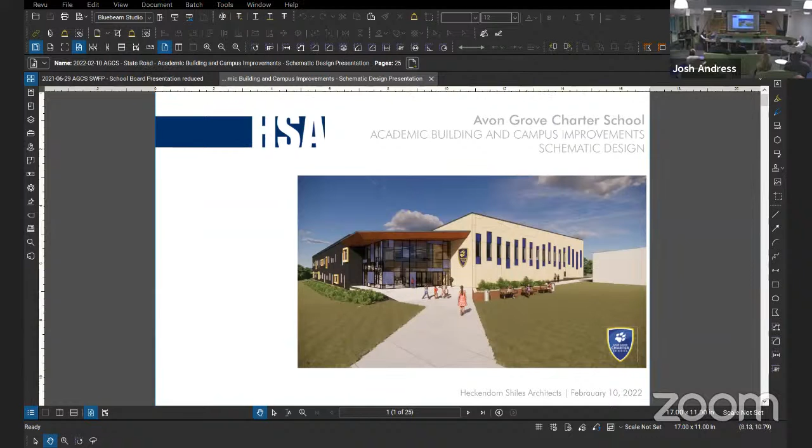Can we figure out what that echo is? Because I'd love to... they're hearing it. I don't know if it's one of your speakers. I want to be muted. Click that. How about now? Perfect. Yeah, thank you so much. Thank you. No worries.

So our intention this evening is reviewing progress, reviewing potential scenarios. There's no intention to make any commitment tonight to move forward with really any allocation of funds. We want to be very deliberate about the potential allocation of funds and taxpayer money to this project. Really, the goal this evening, to a large degree, is allowing the administration to move forward with more specific evaluation of underwriting and financial planning.

It's also important to note that I look at this project as a continuity in the long term of the charter school. Back in 2008, there was something on the order of a 20 million dollar bond that allowed for the rejuvenation of Kemblesville. It allowed for the realignment of Peacedale Road. It paid for connection of sanitary here and many corridor renovations, and an initial smaller scope renovation in the auditorium.

Then in 2017, there was an additional bond issue that afforded the classroom addition at Kemblesville, as well as the space that we're sitting in now. So I think it's helpful to think about this project as a continuity of capital improvements throughout both campuses. And certainly this is an opportunity to plan for the charter school to prosper into the next 20 years or so.

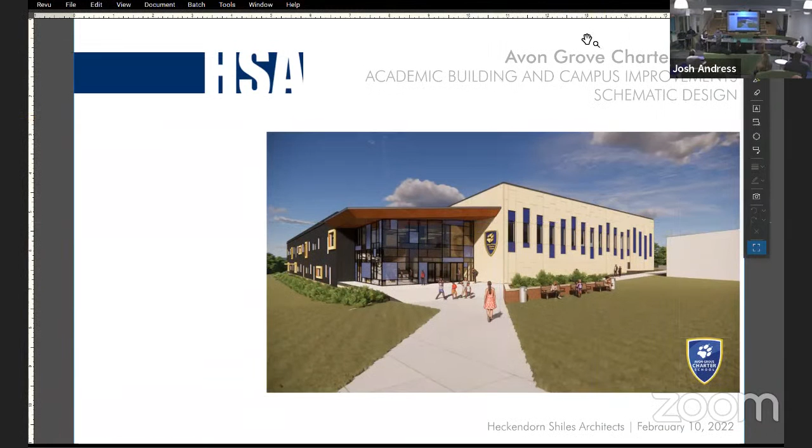So just to lead off, we included this sheet in the overall presentation to help give a little bit of a summary of the extensive amount of work and information gathered and developed since we last met in June. In June, we met with the board and reviewed the conceptual design at that point and the overall master plan for the project, and got direction to move forward in the schematic design, looking at all the campus improvements and looking at a new academic building with the component of the gymnasium included in that. So that's what we set forth with after June.

We contracted with a couple of our consultants to look at the mechanical, electrical, plumbing, fire protection aspects, structural, and really the big piece was site civil, looking at the site design as well. So that's one of the big pieces with this campus and the plans we were looking at.

As a team, we developed the documents that we were able to utilize to garner a construction estimate. That was the end goal of the schematic design process, our design phase, to get the estimate put together. We worked with a third-party estimating firm to put that information together, and we'll be able to go through the budget later. We have even more detail that they provided to us that's not in here. But basically, to get to that point, we put together architectural drawings, the actual one sheet drawings, similar with the site civil drawings. We got a full MEPFP narrative with some site drawings associated with that, and a full structural narrative as part of that as well. So pretty good information for the estimator to utilize in their efforts.

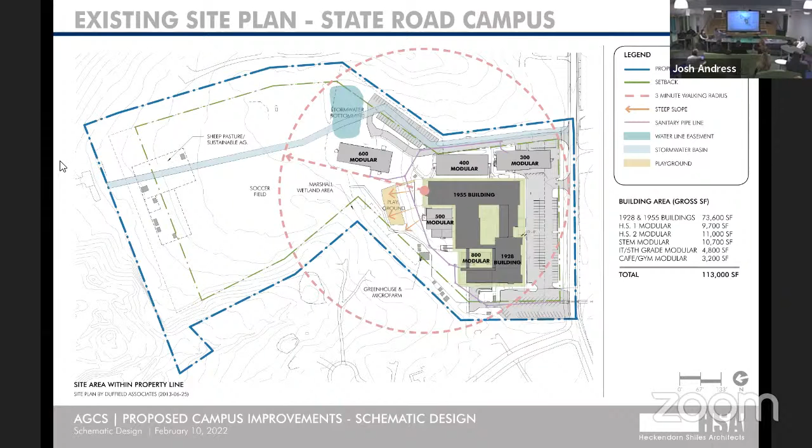This is what we were looking at in June, as far as the overall location of the building and the overall master plan scope of all the campus improvements. The modulars 300 and 400 would be going away, and there would be a new parking lot implemented - that's project A. Project B is the existing cafeteria modular, at the cafeteria level. Whether that is removed or repurposed is still to be determined, but that's the scope outlined.

Item C is this outdoor amphitheater. The intent there is for it to be built into the hill and utilize that steep slope to make it a seating area with a focus on this recreational field quad area. Item E is the suggested relocation of the soccer field.

Item D, which I skipped over, is the proposed stormwater basin. With building this building and all the paving, we have a substantial amount of stormwater that we need to manage on the site. The intent for this project was really to manage all the new construction we're doing, but as well there's an existing issue today where there's a large outfall of pipes that come out off the site and go down through the backyards of all the properties to get down to the stream. We would be trying to capture all of that and redirect it to the stormwater basin as well.

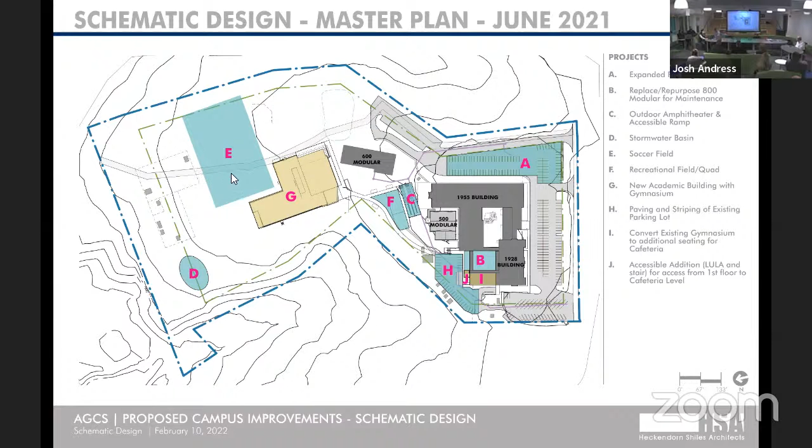That's the major change, with this building moving up here. The soccer field is still in this general area, but it does actually help the soccer field a lot, because when it was over the water line, a lot of fill had to come in to keep it level and maintain the grade. It got to some points where we were very deep to the water line, which isn't optimal. In this scheme, it really lets the field be what it wants to be, and does some nice things visually for the field.

From a campus planning standpoint, shifting the building to the east and reconfiguring it better engages the existing campus. These are 10-foot contours, so the topographic lines don't appear very significant in the graphics, but on the western side of your site, at the bottom of the page, there's quite a lot of slope. Positioning the building there was for a variety of reasons, but mainly because the water line was viewed as a concrete, immobile element. We think this not only saves a little money from a site standpoint, but it's just better campus planning for you long term.

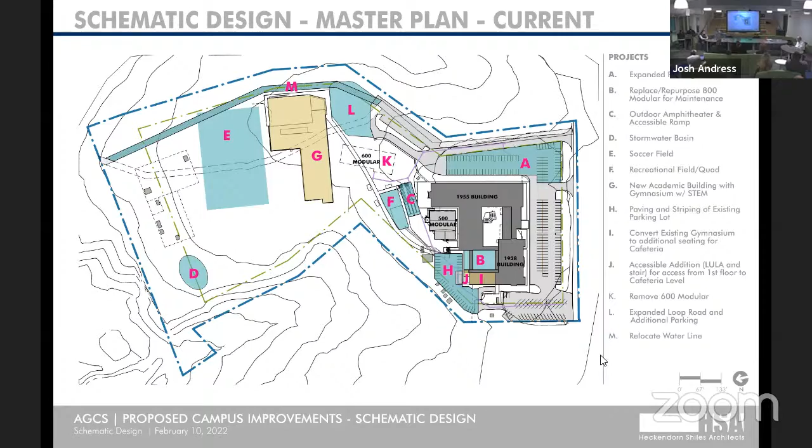The next slide shows the actual site engineer's drawings to give a little more reality as to how that would work out. Coming off of State Road down the loop road, this parking lot would work out and give you access into the main lot, but also down into Loop Road. You get additional length to the loop as well as the parking.

The existing stormwater basin that's there today would be relocated to be a partial underground system, but then also fed into the new stormwater basin on the corner of the site. The building itself, you can see the walkways being proposed, though the exact paths still need to be massaged out.

What's really nice here, and what the township was happy with, is the fire lane and emergency access. The previous location was becoming a challenge because of the sloping around it, and how to get vehicles to it. We had a couple creative solutions they were involved with, but this is much more straightforward—you come down Loop Road and go right around the building, with full access around it.

The way the grading works out is nice, creating a berm that you go down to reach the soccer field, sort of creating a little hill. You're at a higher elevation as you come out of the building, on a natural hillside to sit on and view games. That was a nice little benefit of that solution.

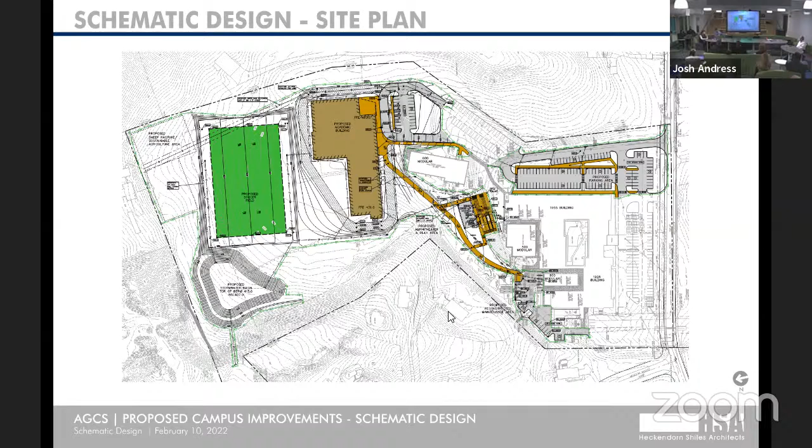So I just wanted to run through the building. I don't need to get in great detail, but this has changed a little bit since we've looked at this last. Still the intent we came into this with, I think we had 27 classrooms, 2 specialty rooms, learning center, like that's part of the educational program depicted in here. We had some administrative pieces we were incorporating, and then the gymnasium. Those are the big picture chunks we were incorporating in this project.

So heading down and into the classrooms, one thing we discussed briefly was looking at the collaborative spaces, and how, especially at Avon Grove Charter, you see throughout the hallways the different types of seating and styles offered to students and how they're all utilized. Even in this space, how those different space types work, everybody works a little differently. The thought was to provide that same variation in this building as well and build it in.

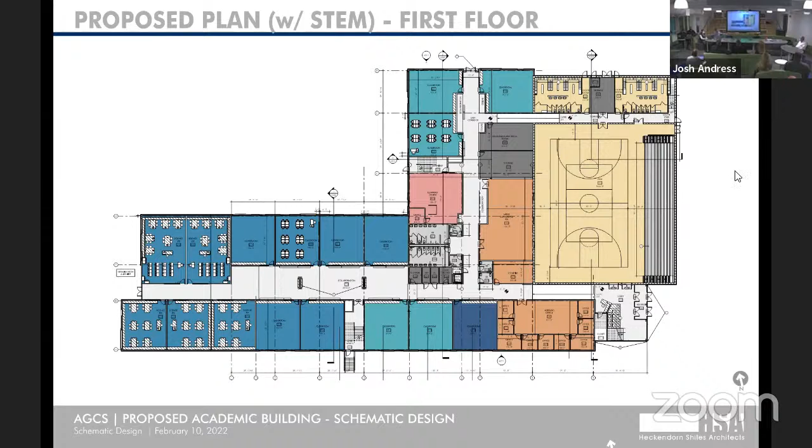The one thing to note again is the gymnasium space. In reviewing it with a structural engineer, for this volume of the gym and locker room, the most efficient way to build it was to incorporate the footprint of the locker room into that two-story space, keeping it one clean rectangular structure.

What that gave us was additional square footage incorporated on this second floor, which we've designated as a fitness center above the locker room area. It has potential for access down to the gymnasium from that level, giving another space for that function.

Is there any questions before? I mean, that's sort of the big picture plans, but I just wondered if there's any questions on that.

In regards to the second floor and access, have you incorporated elevators that would be handicap accessible? Yes, there's an elevator at the core of the building. When you first come into the main lobby, there's an open stair that goes up, but once you go back to the very central portion of the building, there's an elevator that will take you up.

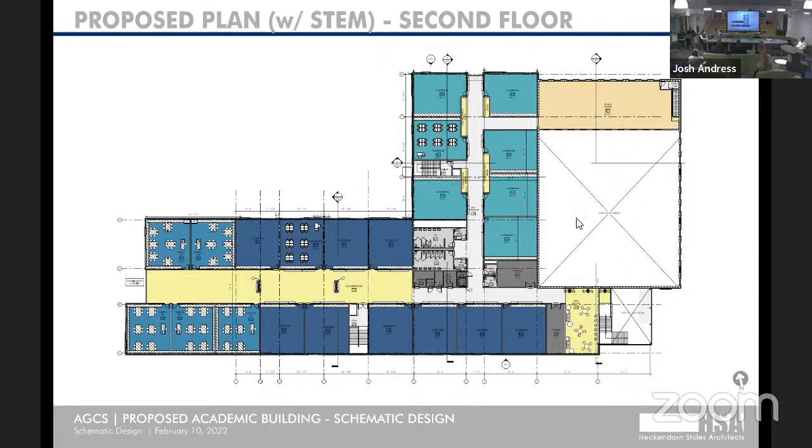So just moving through, this is an elevation to give a little highlight of some of the drawings we've created. Big picture, what we're envisioning is a combination of materials and elements.

Speaking about the parti of the building, we have this little jewel of an entry piece, and then the classroom wings and the gymnasium. We've thought about addressing them in the same way in elevation, so we have more of a glass entry with a wood canopy overhead, which becomes the entry point.

The classroom wings are metal, proposing a metal panel with a randomized fenestration system. We've been able to determine a patterning so every classroom gets about the same amount of daylight, but from the exterior it still has a bit of a randomized look.

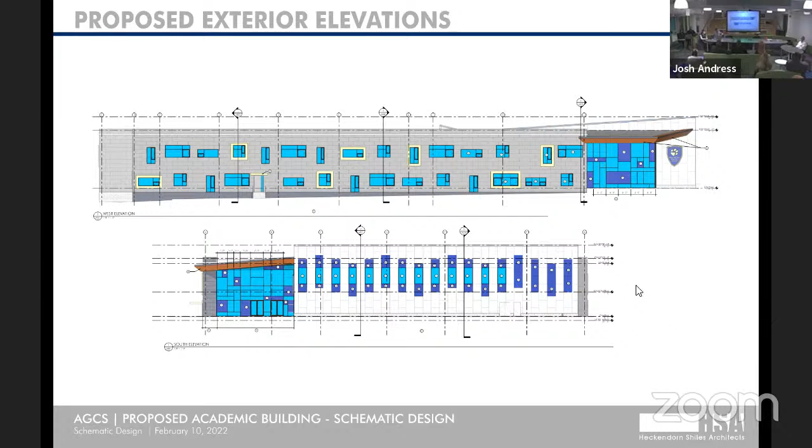At the gymnasium we'd have some glass coming in as well, and we're proposing a fiber cement panel there, similar to material used at the Campbellsville addition, but using coloration differentials to make it more playful while keeping it simple construction, with an undulation of the material to create a playful wave on that building.

So now we have a plethora of renderings here. This is again the view in that original location, Location 1 as we were calling it. This is coming up to the main entrance, the gymnasium space, classroom wing. This is still showing the 600 modular location as it is today.

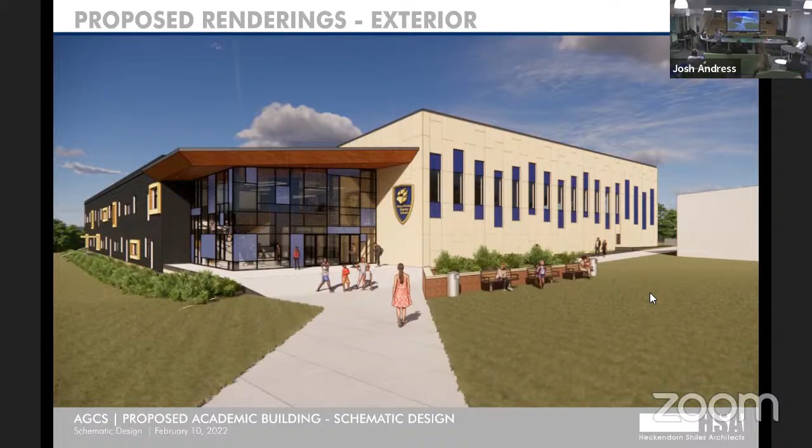And then moving into the lobby, we're proposing more of an open lobby space. That wood canopy at the entrance, the idea is for it to drive through the whole space to help tie the inside and outside together, with some graphic walls to help tie together goals and branding from the school onto the gymnasium wall, leading you down into the corridors.

These two doors would take you into the gymnasium on the right, with some bird's-eye views from the upper level into the gymnasium. This is proposed as another open collaborative space, so as you come up the stairs you're in a more comfortable zone. At the main entrance we have a greeter station as well as some built-in seating incorporated.

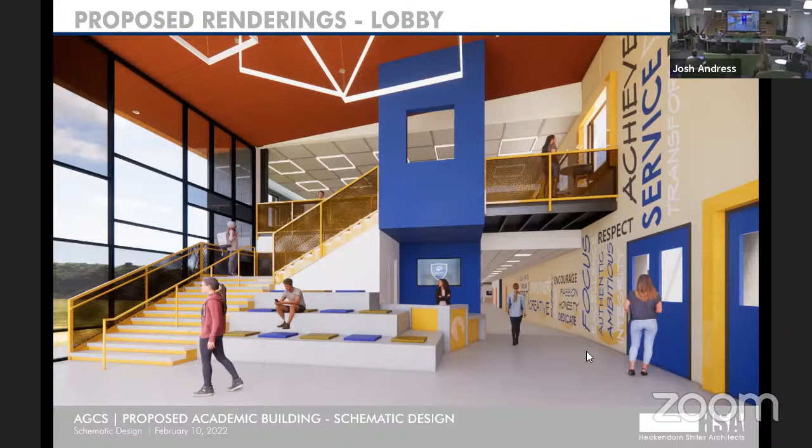We partner along with Corbett, who has done a fair amount of furniture work at Avon Grove Charter School for classrooms and different spaces, this space included. We work hand in hand with them to put together images of our typical spaces. This is a proposed typical classroom, showing some accent paint and how that furniture goes in. The idea with the classrooms is to be pretty typical for a large portion of them. Obviously the science classrooms would be more specialized, but these rooms would be a straightforward and clean design.

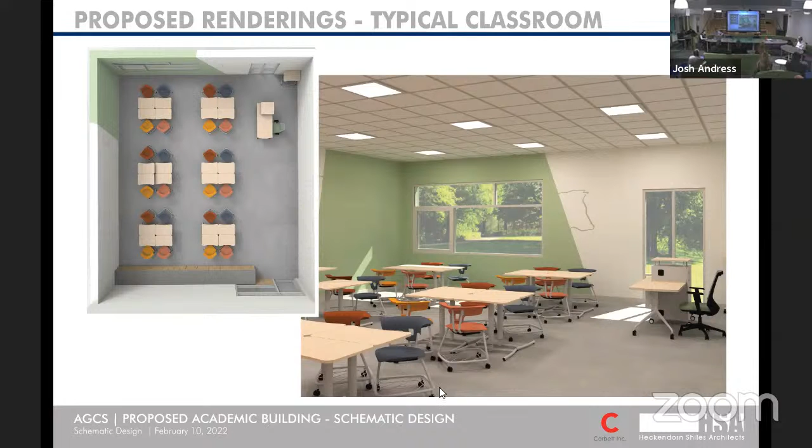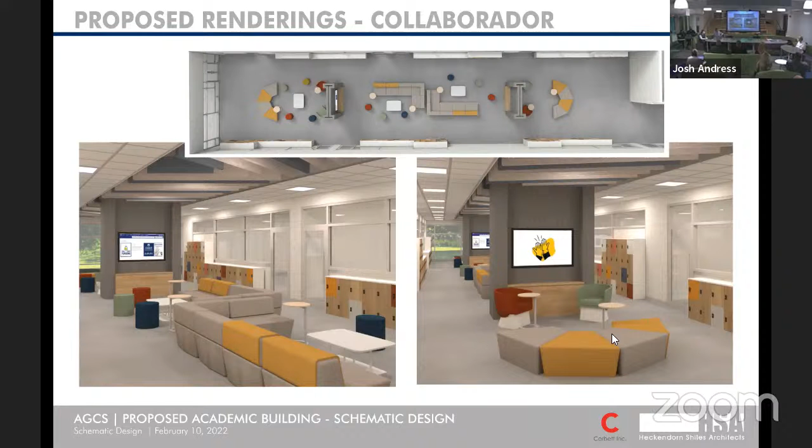We have a couple images of the collaborator space, the open space that the classrooms empty out into. This slide and the next both have imagery for that, and this one depicts it lined with lockers, which would be located in this area as well. We're looking at furniture solutions to develop the space, and at building some built elements to help organize it and give displays. There are two different schemes looking at different ways of doing that. One option is a little less built-in to give more flexibility, with more of the displays built in as part of the furniture rather than as a constructed element, again for long-term flexibility to allow the school to change how that space is used.

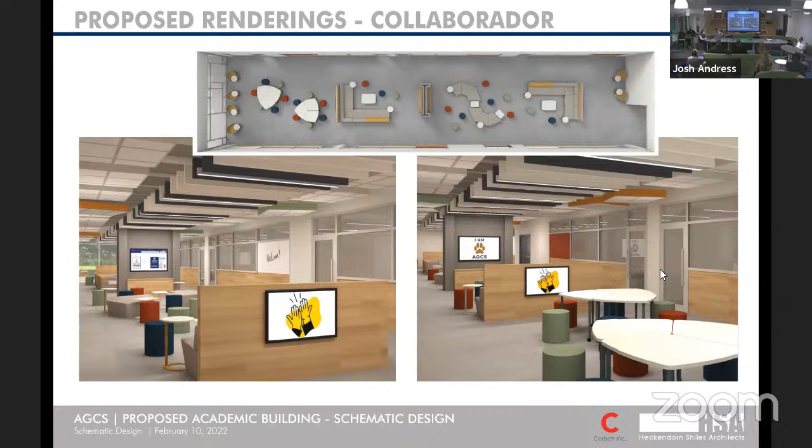This is an image of one of those collaboration nooks, down near the end of the corridor. This one actually combines it with the one across the hall, aligning to create smaller scale spaces that are undercover with a lower ceiling, with some whiteboard writing surfaces, giving a bit more of an intimate feel for that use.

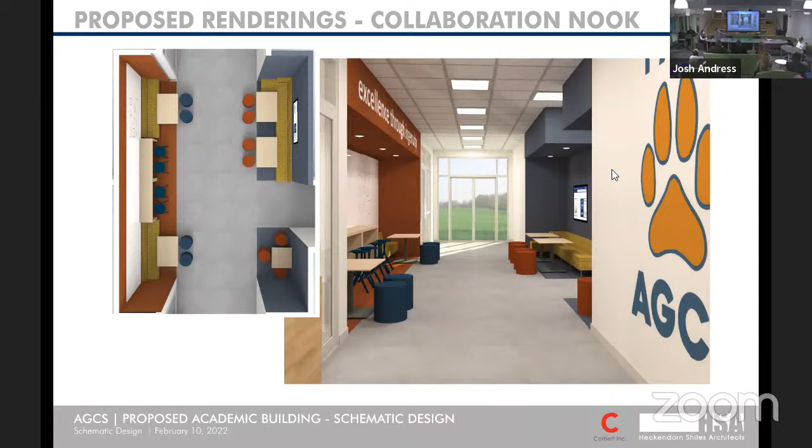I have one image of the hotelling space, the open hotelling office with the private offices around the perimeter of that.

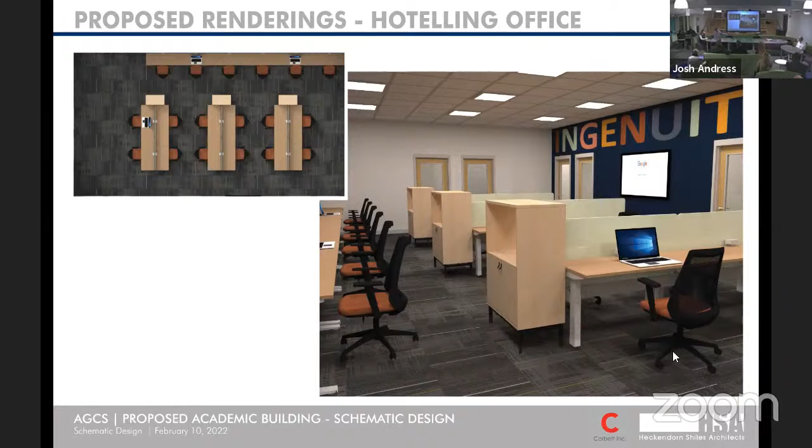Yeah, so from a budgetary standpoint, what we wanted to do was track with some continuity. No, we just wanted to be able to track with some continuity. Yeah, I should actually zoom in. Yeah, I would have just exited out of there.

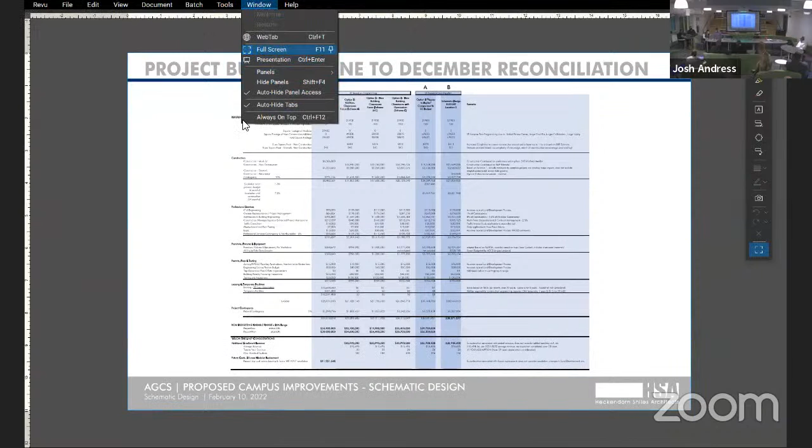We wanted to track with some continuity between what we had looked at with June and where we are today. We really have two different ways of looking at budget. This first one simply compares what we looked at back in June to where we are now, in an apples-to-apples condition. Then our adjacent, next budget looks at some different potential scenarios that would be worth considering in different fashions to move forward.

Back in June, the budget evaluation started from our collective knowledge of the need to replace the modulars. We looked at option one, essentially a modular replacement project. Option two was an addition to the existing school as a classroom building addition, with two different options, or three different schemes: scheme A was an addition with just classrooms, and schemes B and C were a new building with just classrooms. Option three was a new building with classrooms and a gymnasium, and that was the direction the board asked us to proceed with.

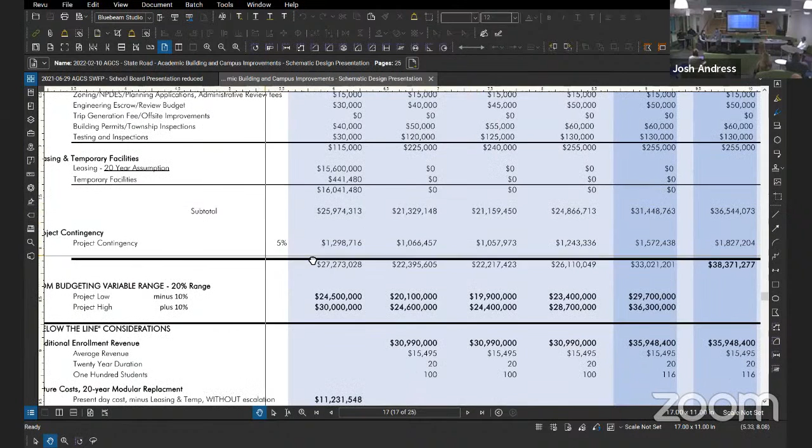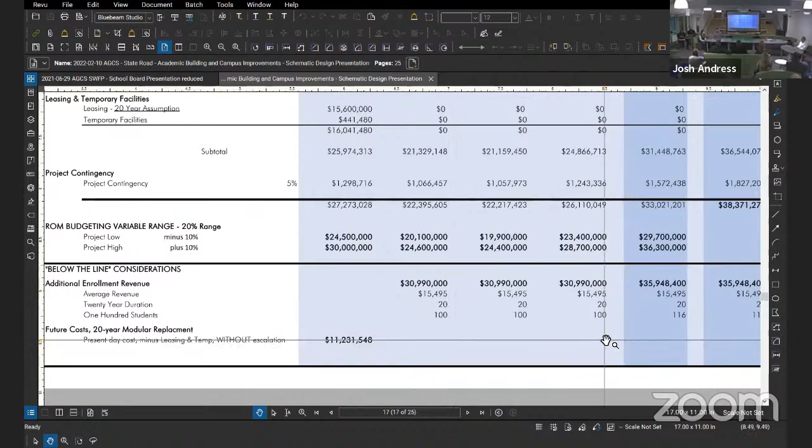Just as a reminder, with the modular approach there's additional cost in terms of life cycle lease costs and life cycle replacement costs after 20 years, et cetera, that hard construction doesn't bear. In all these scenarios we carry project contingency and construction contingency, and we also quantified some below-the-line numbers associated with additional enrollment revenue, expecting that bricks and mortar construction versus modular would enhance, to a small extent, the student population. Back then we were just carrying 100 students in dialogue with the administration about the parent pool.

What we've essentially done is, based on some of the adds to the project like the fitness area and that large meeting room, grow the square footage based on programming discussions with the administration, and also add in an escalation, because back in June we were working in 2021 dollars, and now an escalation is included, anticipating a construction start down the road.

So from an apples-to-apples standpoint, the new building with gymnasium adjusted was in a $29 to $36 million range. Where we had landed from a schematic design standpoint, based on additional detail, was around $38 million. This is sort of an apples-to-apples comparison.

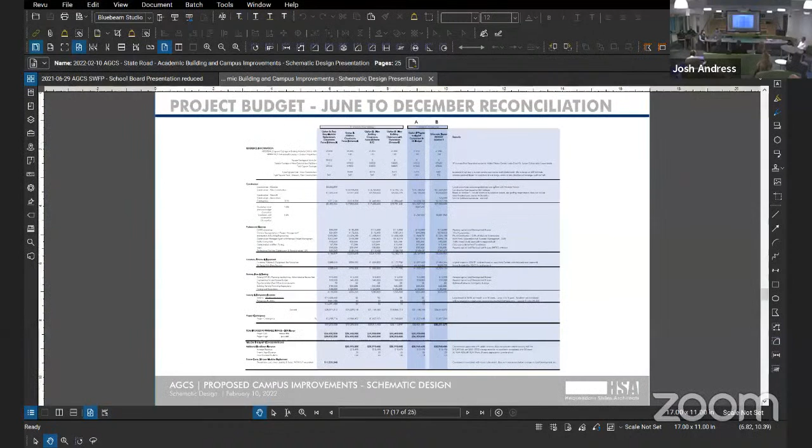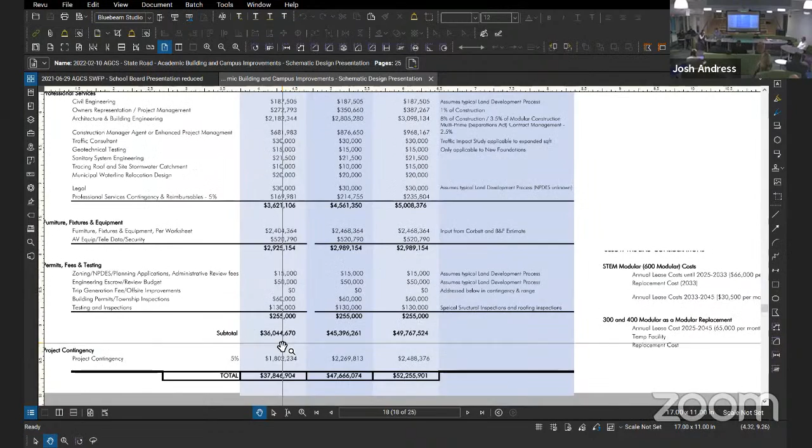So the actual budget for a new building with classrooms and gymnasium, with the new site plan, landed with the detail we've gone through with mechanical engineering, site planning, and input from the township. Essentially we're landing at a little bit less, because we're saving about $500,000 by moving the water line and reconfiguring the building. So this is all a bit of abstract math.

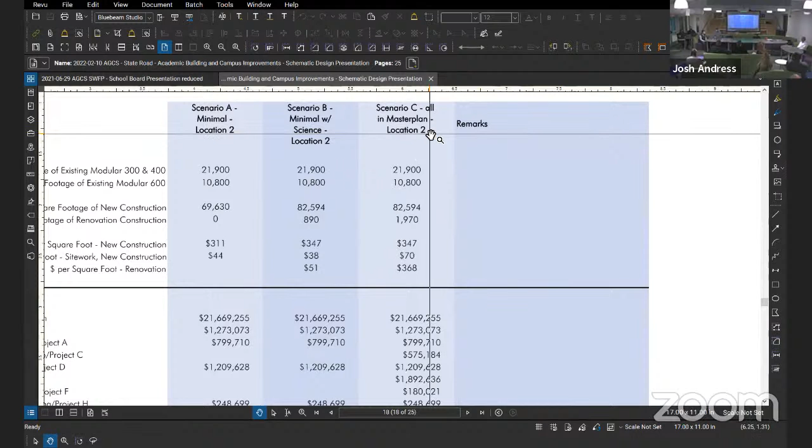We have some scenarios that show what this looks like in terms of site plan. But essentially what we've arrived at as food for thought are potentials: Scenario A, which is the new building, gymnasium, classrooms, no science labs, and not a replacement of the 600 modular. Scenario B, which adds the science to the project. And then Scenario C, which is really all the master plan improvements, kind of an all-in scenario.

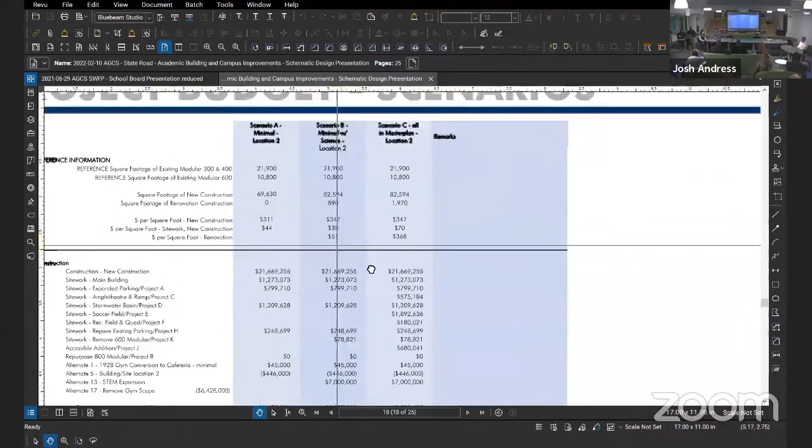I would also note that as you look at the budgets for these, there's a healthy amount of contingency. We know from media coverage that a lot has happened in the last year to construction costs and escalation. All these budgets, whichever scenario we look at, carry a 10% construction contingency. They're all carrying escalation costs, and on top of that, a project contingency.

So for instance, if we look at the middle-of-the-road option, Scenario B, which is new building, new classrooms, gymnasium, and science labs, we're carrying $3.1 million in construction contingency, $2.5 million in escalation costs, and also $2.2 million in project contingency. Add all that up, and in a $47 million budget, you have $8 million of contingency. That's about 17%. It's arguably a lot, and yet I think it's important to note...

When we're in schematic design, which has a whole lot more detail than we did last summer, it's still early in the design, documentation, and engineering process. We're including contingency because we expect to use it. As we started out tonight's discussion, this project was really paid for by contingency that wasn't used over at Kemblesville. Some of the other infrastructural projects years ago were the same sort of scenario from the original budget.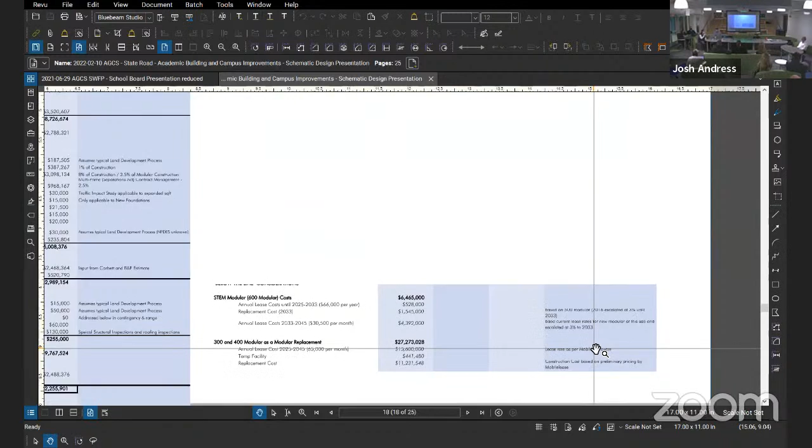So I think one thing we tried to include on this page, because it really applies to Scenario A specifically, is the STEM modular cost. I think that's important to understand. If Scenario A is the path to be investigated, the STEM modular is going to be replaced in the short term. So what is that cost? We have an estimated cost in here for what that potentially could be.

So we garnered some input from MobileLease, who's the vendor that's put in a couple of the modulars here, or has done the 500 modular. The one thing they've said to us recently is they assisted us with our original budgeting, it's just that rates have been skyrocketing for their lease rates. So we've added some escalation to determine what that rate increase might be, that's 10 years from now when it would start, so it's really hard to figure out what that would be.

But even now, I believe they're at $22,000 a month, whereas for the STEM modular, you're paying $66,000 a year. So it's pretty substantial increases from what the current school is currently experiencing as far as those go. The STEM modular historically was a less expensive lease because it was a used modular when the charter school installed it.

So the next few pages show in better terms those three scenarios. All these scenarios involve relocating the building and relocating the water line, and that again is our recommendation after we got the pricing back and continued discussion with the township. I think that is the most logical approach.

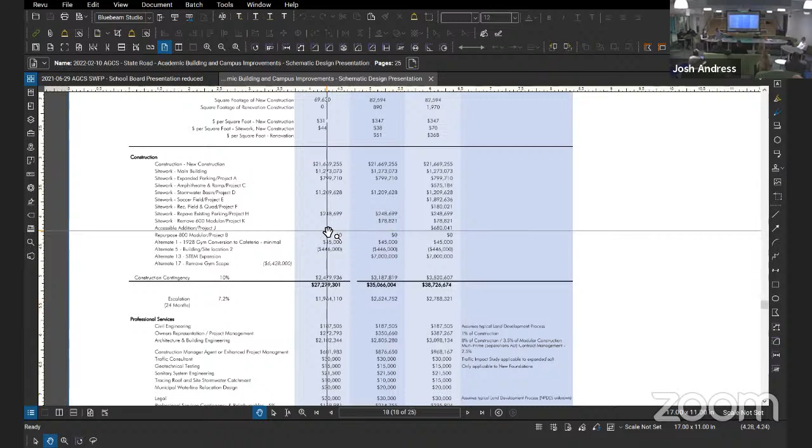Could you just repeat the question, because they probably didn't hear it. So the question was what happens in scenario A and B with the soccer fields and some of those other pieces - if there would be additional costs incurred if those need to be built. The answer is yes. So as we constructed the budget, we have line items for all these projects to help understand approximate costs they might garner.

So the soccer field's on here, and again it varies per location - location 1 versus location 2. Some of these are all estimates at schematic design level, I guess the best way to state that. So there is an additional cost. There's nothing to say that any number of scenarios couldn't be developed.

There could be scenario A1 or A2 or D, E, F, however we want to do it - variations on that, the scope plus the soccer field to understand what it can be. Those are all viable approaches. But generally in this scheme, if we did just as it's shown, the field would be graded out, it'd be grass, but it wouldn't be graded to be a nice flat, regulation soccer field.

Any other questions?

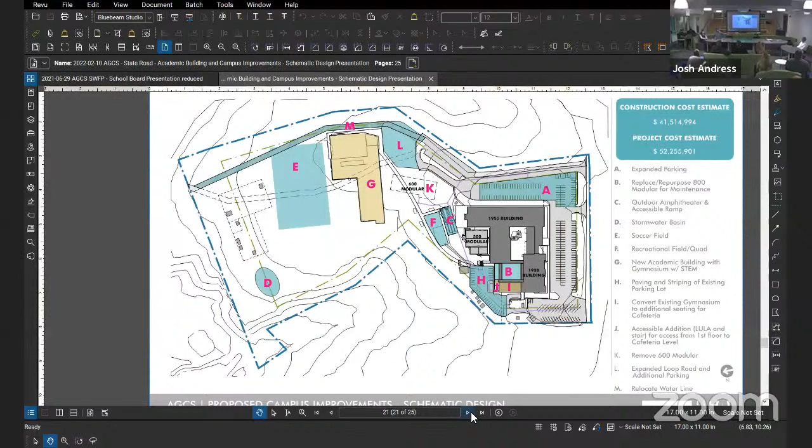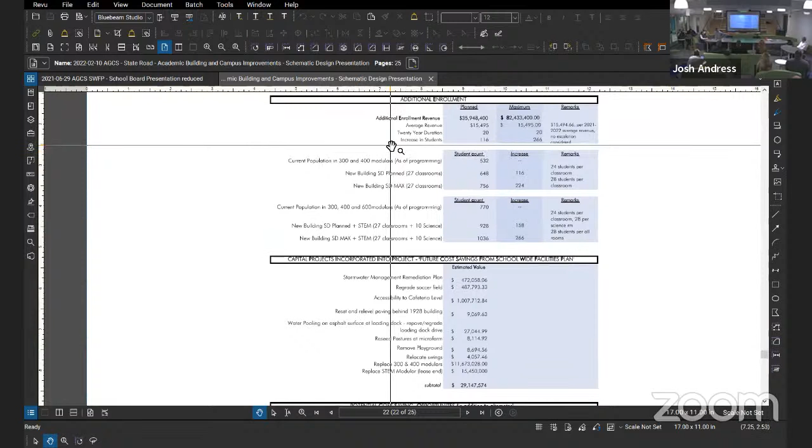And the last page of what we included as part of the budget portion is really just some additional information that might be helpful in the overall evaluation of the project. Looking first just at the enrollment potentials - what we targeted when we started this project was adding 100 students, and using that parameter based on the existing student population, we figured out how many classrooms we need.

And so when we actually went back and said this is how many classrooms we need, if we put 24 kids in all these classrooms, it actually gives us 116 students. So that was the number we targeted. This chart below goes through the current population, the planned population, and then the max population. And really, that's not saying that that's the intent, but really the available space.

Obviously, if you're building a building of this magnitude and cost, you want to make sure you're building this for the future as well, that you're not going to be two years down the road maxed out. So we're planning for 100 students. What we have has capacity for 116 at the ideal classroom size. If you increase it to 28 students per classroom, that's what we're calling the maximum size. So there is potential space for more growth within the building if the classroom sizes get larger.

It's very nuanced, but there are even more opportunities in the building the way it's configured now to tweak that even further, as there are a couple specialty rooms that, if repurposed into other types of rooms, could be used as classrooms. There's a lot of different nuances you can get into, but big picture, this is right now what's easily built in and understandable.

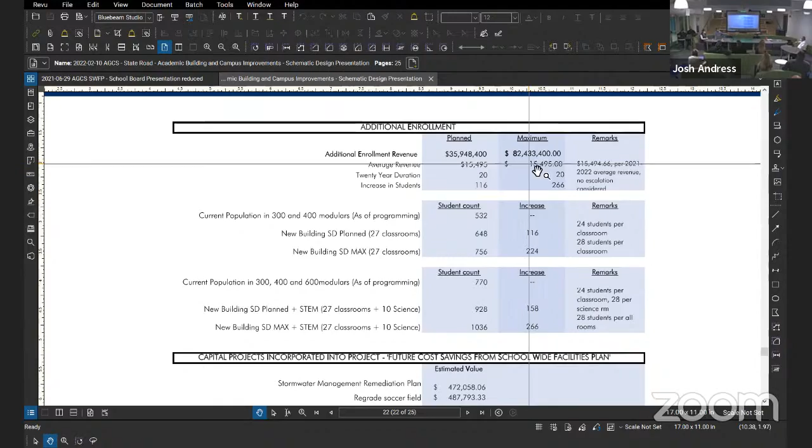The other factors to be considered: there are a number of capital projects identified as part of our campus-wide evaluation, and quite a few of them are able to be incorporated and absorbed into this project.

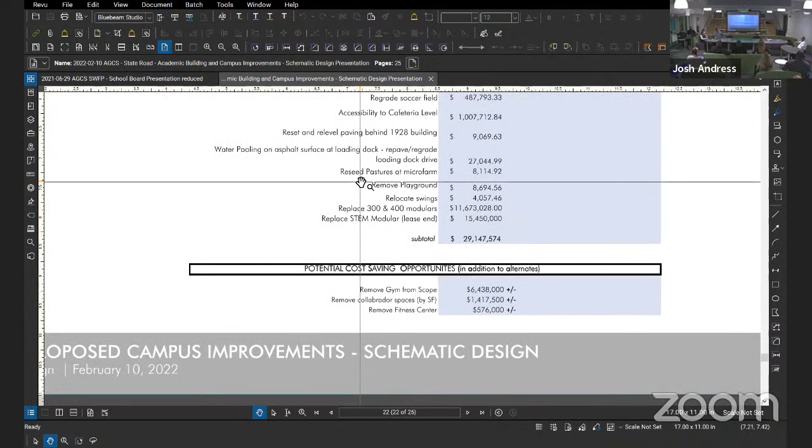The stormwater management we discussed before, regrading the soccer field to make it a regulation field, the accessibility of the cafeteria level, the paving behind the 1928 building where there's water pooling, the pastures, taking the playground out, relocating the swings, and then the modular replacements. All those pieces would be absorbed into this project, or are costs that wouldn't come down the road but would be taken care of as part of this project potentially.

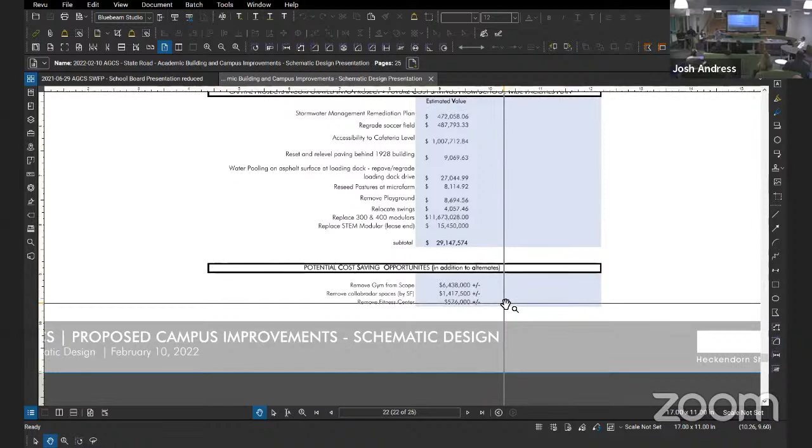The last piece is a few items we pulled out of the estimate. At the beginning of the project, the gym was a bit of a debate as to whether it was included or not. Since it's a pretty standalone element structurally, we asked what the cost would be if we just don't do the gym. That's a rough idea of what the savings could be if we don't do that.

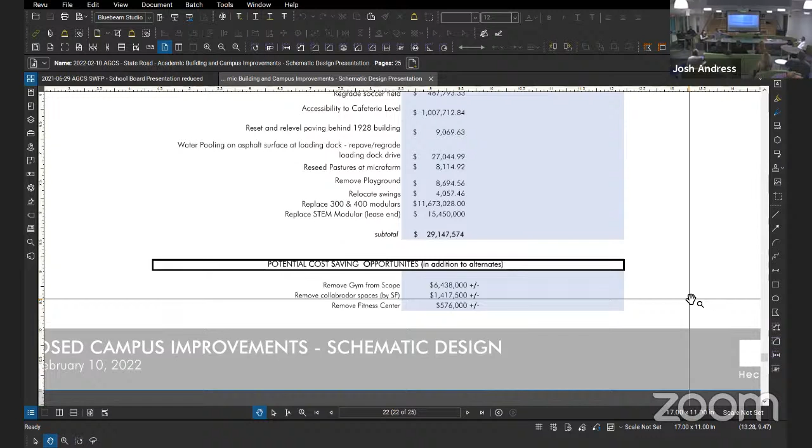If we remove those large collaborator spaces, what would the savings be if we don't go that path? Same with the fitness center - if we don't do the fitness center, what would the potential savings be? These are just food for thought as far as potential alternatives to the design for cost savings on the project. We wanted to start a list of that and put some of those pieces out there.

Question, can you guys hear me? Yes. I have a loud voice, so.

Any considerations of what potential cost savings would be with just having a new building that's more energy efficient, based upon the modulars we have now clearly not being efficient for heating and cooling? Is there anything we can project where there could be cost savings for the school, or would it sort of equal out?

The question was the potential utility cost savings over a 20-year life cycle by having a more traditional bricks and mortar building with a modern HVAC system, rather than modular units essentially using heat pumps that aren't particularly efficient. Modulars are also temporary buildings subject to different energy code requirements versus a building like this being built in 2024, 2025.

It would have continuous insulation and modern HVAC systems. We haven't quantified that, but we can talk to the mechanical engineer. It's a valid point, insofar as there's additional...

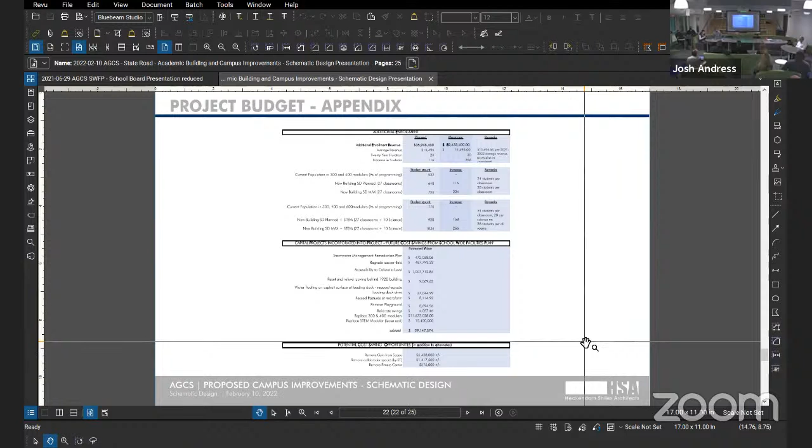Question for Donna: with the all-in project, do you think the bonding solution would be feasible or not? Can we hold that for Donna, let them get through it? Then we'll all come back and talk about funding. I want to ask that question, but can you hold that for a second, Jean? Thanks.

This is somewhat informative, just understanding the project team and how we've been moving forward. We've really been acting as project managers as well as architects for the school, consistent with how we've been operating in our relationship. Right now we have Schiller and Hersh, Providence Engineering, and Becker Frondorf working with us as our design team.

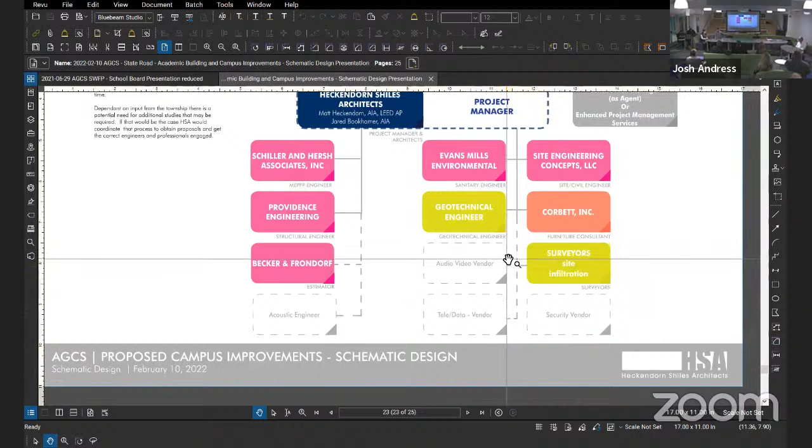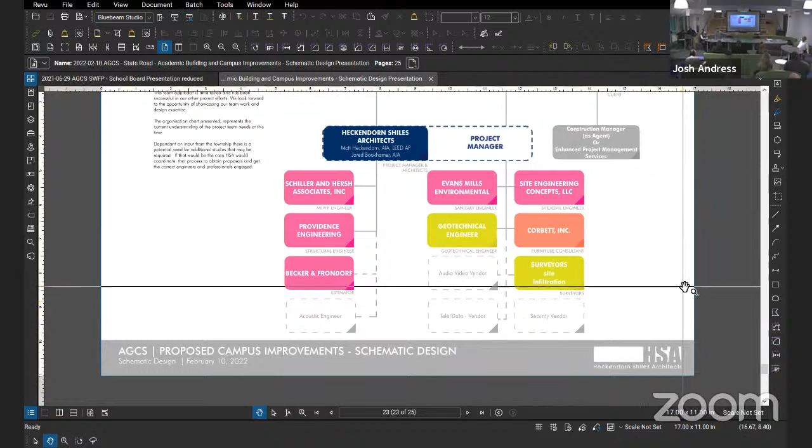We've been working with the site civil engineer, who will be technically contracted directly to the school but is part of our project team, as well as an environmental engineer working on the sanitary and water line realignment. There are other elements identified as potential players who might need to come along—we know we'll need a geotech engineer and surveyors, but there are also potentials for audio, video, teledata, and security to be incorporated. That's important to understand as we get into proposals and the next design phases, as far as the overall organization of the project team.

The last piece we have here is the project schedule. The final slide has all the detail, and there's a lot in there that I encourage you to look into if you care to. But this is at least the highlights of it.

What we were trying to do here was highlight all the points we anticipate, at a minimum, being with the board to review the project status and opportunities for the board to make decisions—definitely milestone points for decision making. We completed our schematic design phase, and we're here tonight. As Matt stated at the beginning, the goal out of this would hopefully be for Donna to move forward with underwriter assessment.

The potential we were looking at was, if we're able to come back in March and the information is all here and ready to go, we could potentially move forward with design development. For us to do that, we'd need some decisions on what level of scenario we're looking at for design development. It's important to note that's not deciding what's going to be built—that's just deciding what's going to be designed to that next level.

Our intent would be to go through a similar process to what we went through for schematic design. We would go through the design development process with our design team, develop more detailed drawings, and then have another estimate completed on those drawings.

So we'd have another checkpoint to be able to say, here's where the numbers are all coming in, and then we could use that to refine further for what actually gets built. The one caveat with that would be whatever decision we come to there would also be what we're deciding to go to the township with.

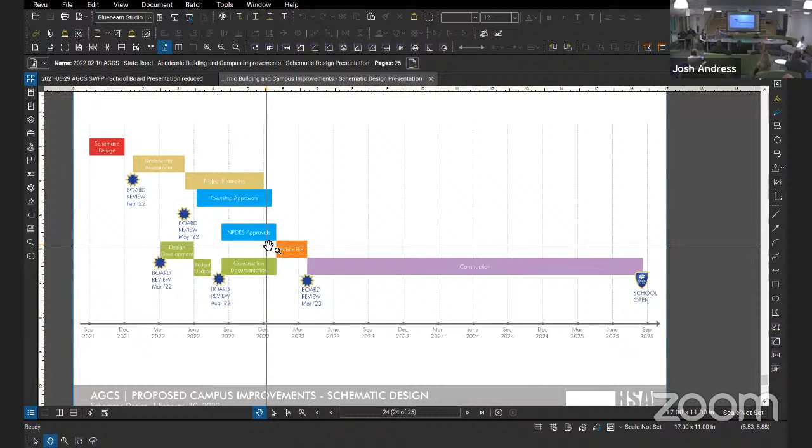Looking at if we're able to start in March of '23, that's a really nice time of year to start construction. That gives us time to do pre-construction. They can come out, start doing some site work, and then they can really go gung-ho once students are out that summer and go hog wild on the site. So there are some benefits there.

I think our overall construction window is healthy, and it's nice that it will benefit the school long-term as far as costs. If you give them a constrained construction schedule, costs are going to increase. So we can give them ample time to do the project, and you'll see the savings. That's reflected here as well.

And then the last piece, we're showing this opening in fall of 2025. The intent really would be for the building to be done in the spring of 2025. There's a lot of pieces that can't be completed until that last summer, like the modulars can't go away until the building's ready. So the building would be ready.

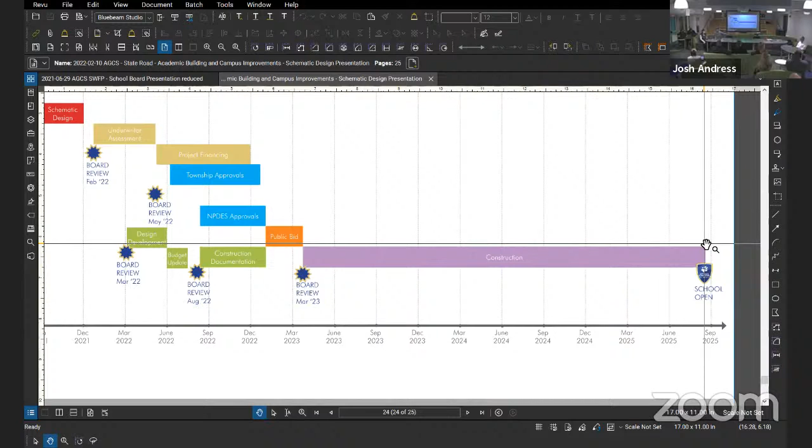Then that last summer, the modulars would all go away and all that site work associated with them would be occurring. So there's a lot of work happening right up to school, I'm sure. But the hope is that the building would be completed in the spring, giving the school ample time to move in and occupy the space before students arrive.

And as I said, this is sort of the extra level of detail that generated that summary, but that's sort of the highlights of that summary.

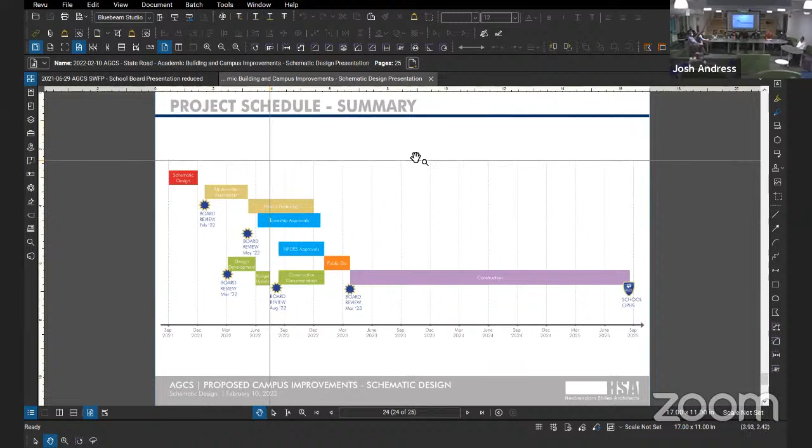First we'll go back to Jean's question - thank you for waiting for that. Jean asked Donna about the bond and what your thoughts are.

So we'll start. Okay, so the first thing we need to do - I mean, we've been looking at this and we've been setting ourselves up for a good cash position, and the board has been very good about committing funds each June for future expansion and capital improvement. So that number has been growing. When we originally started talking about this, we were looking to save a good portion of what this would cost.

So as we move into financial planning, the next step would be to bring in a financial advisor. We would run the models for all scenarios to verify the school's position, as well as confirm our rating and that we'd keep our investment grade rating.

There's no escalation currently in the student rates. That's an important piece, because right now it's not going to stay fixed for the next 30 years. We're going to be looking at increases for those students. So my recommendation would be that we move forward with a financial advisor.

Two RFPs have been prepared for the finance committee tomorrow to review, so that we can send those out and get some applicants in to look at. I have some recommendations, and I will be reaching out to them directly.

Along with that, we would need to look at the underwriters. I'm not sure what the scenario is going to play out, to be honest, but I think we need to have somebody come in and help us do those financial models and see what's in the best interest of the school. That's what we did when we did the addition at Kendallsville.

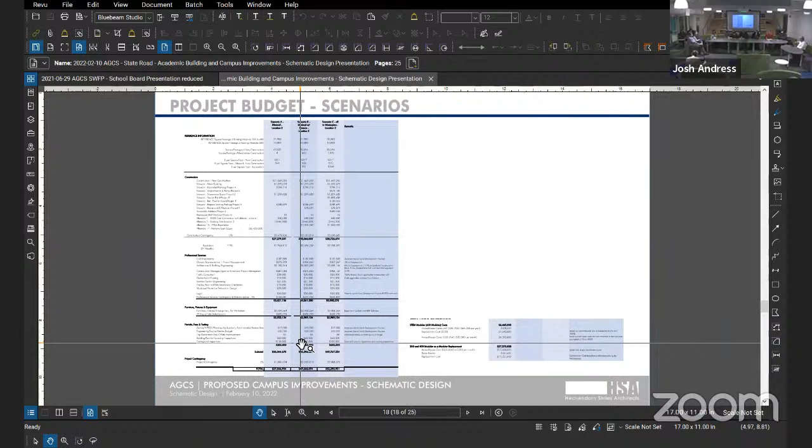It is nebulous right now. We've heard a lot of scenarios of what that might look like, so I am concerned that we have the right advisor who understands the political climate we're in, and that those numbers, while they may look like what they are now, could take ups and downs where those projections of how much we'd be bringing in per student could dramatically change. I think that's a huge factor, because as a charter school we don't have the ability to levy taxes to make changes, so we're really fixed in the amount of money we can spend. So my question is about that process and what we'd be considering to help us plan.

I'd like to release the RFPs to the board — I wanted to share them with the finance committee tomorrow morning. Part of the criteria in the RFP is their experience with charter schools in Pennsylvania, and the number of bonds they have worked with to secure for various charter schools. So that is part of the criteria.

Also part of the criteria is we're going to look at their successes and their failures — we want to see exactly what their experience has been. Back in 2008 and 2009, when things started to go down, charter schools were impacted in 2010, 2011. We were very fortunate that our financial advisor looked forward, and we also had a lot of expertise on the board to run those models and validate them. So we'll make sure that criteria is in there, and we're going to look at their previous experience.

Maybe it's an answer, it's a question either for Donna or Kristen. The increase in the number of students from our charter renewal, does that play effect next year, or is that only once?

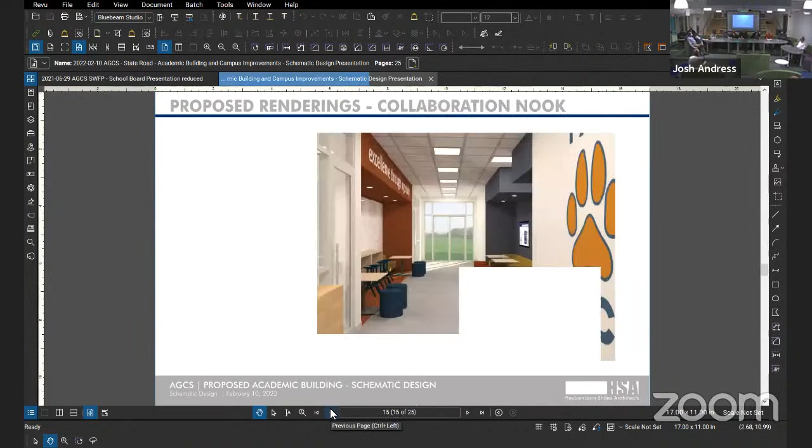Collaborative spaces are still what students are looking for. That's how we prepare them to be learners, to work in teams, and to prepare them for careers. I know that was one of the items where we said let's not consider that, and I'm certainly in favor of those spaces, but what kind of adaptations are there, and are there spaces we can see of where something like this works somewhere else?

Because I think it's a wonderful investment, but there's concerns of whether it's going to be used and how it's going to be used. Because I know that's a concern in these hall corridors right now, because you can't use those spaces probably to the max of how they would like to use them here.

That's a good question. So in general for the design of space, we would be utilizing some elements to help address the sound, knowing that that's going to be an issue. It's a corridor too, it's a hallway, so there'll always be a lot of people in them. So that definitely is a concern, and that was something we brought up when we spoke with various groups and teams, as far as teachers, about how this space would be used. Would it be used?

And even how the classrooms address that outdoor space - they want to really be focused on that, and have it sort of be like you open up a garage door and that's part of your classroom. Would that be utilized? It really came down to what we're showing currently, which is more of this traditional storefront glazing, so you have visibility but you have that separation from the space.

So Casey, if you look at the picture there, the classrooms actually have walls with windows. They can see the kids in the space, but they can't hear the kids in the space. Similar to a lot of office spaces that have the open concepts in the middle with the lining of it. But also some of those other barriers are sound barriers, and they're absorbing sound.

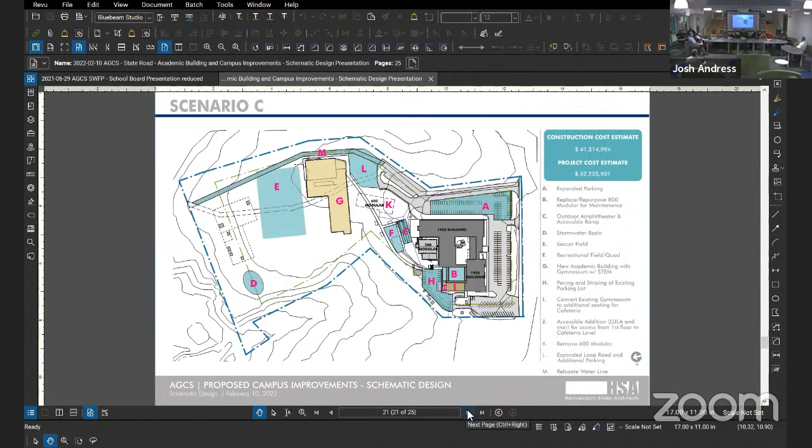I believe we did note that, I think I did touch on that. That was actually something that we included on our team as well - an acoustic engineer, primarily as it becomes pertinent to classrooms too, really the acoustics within a classroom. There's a lot of studies on that, as far as optimal ranges for kids in the back, kids in the front, how they're really going to work in those spaces. Kids with different abilities as far as hearing as well.

I guess I have one other question. No, we all have, you're fine. Don't ask about solar. I'm not asking about solar. I like green buildings.

So one of the options is about the STEM and science buildings. Is there consideration given to where science learning is going? We've surveyed current teachers, but science learning has changed a lot over the last 20, 10, 5 years. Are there outside educational consultants who work with school architects on what the future of these spaces will look like? We're using computerized design now, not chemistry, but it's not the typical old lab spaces many of us are familiar with. How do you get that information beyond stakeholder input?

To some extent it's input we're generalizing across different schools, private and public school districts, so there's a certain amount of our own experience across projects. We could potentially engage a lab planner who could give us input on best practices to provide the faculty stakeholders additional feedback and considerations. These are very expensive spaces, loaded with extra electrical and plumbing and all that. Okay, thank you.

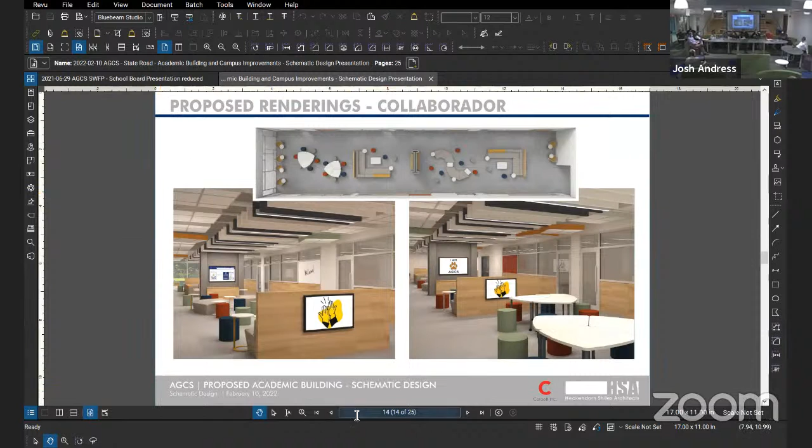My question is more around - can you bring up the slide that shows everything, the site plan? Yes, thank you. So has any thought gone into this, because we already have problems with traffic and getting people in and out and around safely. I know the township loves us, the police love us. So has there been any traffic study or something like that?

How much do we gain from this - today it's great, but should we add, I think your max was 266 kids, potentially 266 more cars coming through, what does that do and how does it impact us? Not to mention, if this moves forward, we'd have construction on this building going on mid 2024, and I'm going to assume those trucks and construction logistics are going to want to come in here too. You may not know those answers today, that's okay, but I'm looking forward to understanding the bigger piece of getting in and out.

The township's exact words were, did you double it? They said, you doubled the amount, right? It's like, no, right now you're adding maybe 15 more cars to the car line. Yeah, which is huge as far as capacity we're adding.

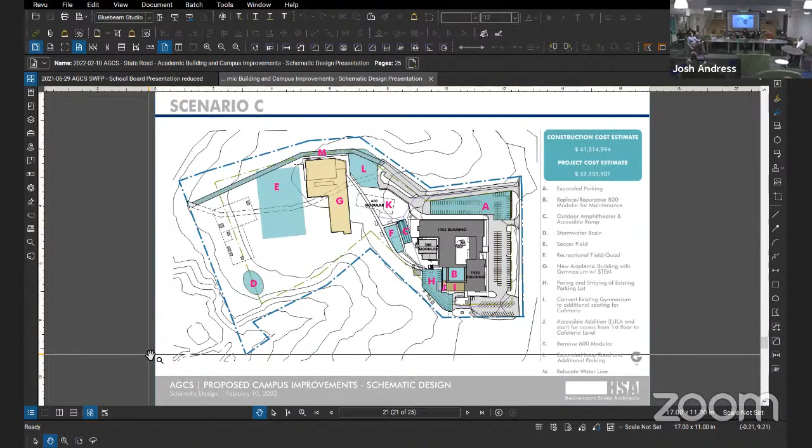The other thing we haven't really gotten into looking at - and I want to go to Dan's plan because his is more accurate as far as the site plan goes - right now this is sort of its own little lot over here. Whether that could be incorporated into the pathway of drop off, we would need to evaluate because there's potential for added length. Does this somehow get involved?

Can you double load things? I know Kemmelsville got creative with their parking lot to stack up the lot and wait it because it was more for pickup, since everybody comes early to pick up - stack the lot for pickup. Drop off moves fairly quickly, it's more so in that aspect. So maybe there are potential solutions there as well.

Are you still planning pick up and drop off along there - I'm asking Kristen Bishop. Yeah, that was the plan to have that. We're looking at buses too, but senior parking - right now we can't even park all our seniors at the school. And we have kids walking down State Road, so there are conversations around continuing to do the loop road.

But then, how many cars are we actually talking about, how much bigger can we fit cars into that loop road? And does it make sense to drop kids here so they're not walking through a parking lot?

All questions, but that's on the list. There's a lot of, even for double stack, you can almost double stack the whole road now that you have another way out. From this exit point, you could double park people the whole way down through that. We should double your car length. What I don't want to do is whatever we build, end up with something we can't get to.

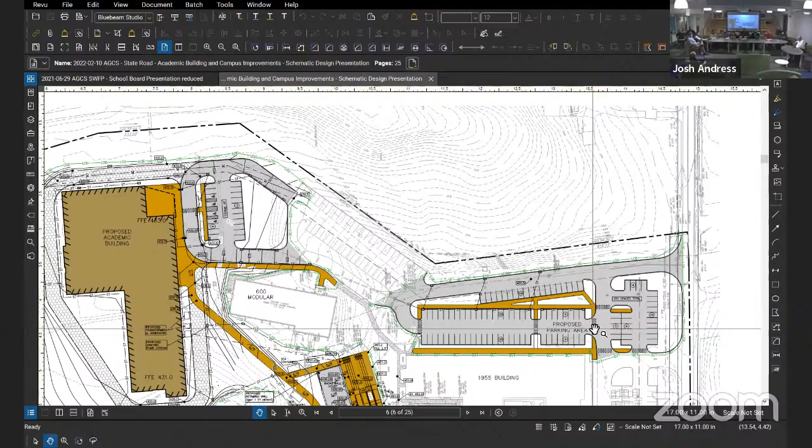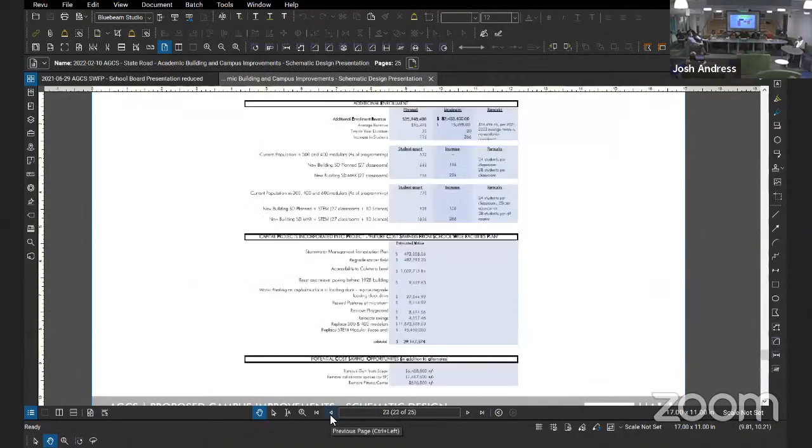I guess my last question, and I'll have Deji and Donna come on. So let's say we move forward and the board decides on whichever one they pick, but let's go the most expensive because that's the one.

How do you feel about the repayment and the time? Do you feel, based on what you know today, if everything was approved and moved forward, the bond and all this stuff, you feel comfortable with a $50 million, $25 million? No, my answer to that question is you can't answer that question yet.

Okay, that's a good question. That's fine. I think I touched on your question, that's where the experts come in. I just wanted to know what your thoughts were. We don't know what we don't know. Well, that's the other part. Exactly, and it's the market.

So we're going to the market and we don't know what the bond market will be like today. There's so many variables here, and that's why we need to bring in experts, and the analysis will go from the time we engage them till the time we actually close and go to market.

Do you have an estimated cost on what that's going to be, like the advisors and stuff, just to find out? Do we have a budget of what we think we're going to spend? It depends. Give me a ballpark. All in, if the budget is approved and we move forward and we start now and we go to market...

It could be anywhere from $40,000 to $45,000. So the high water mark was like 45,000. Oh, okay, so it's not millions. Well, thank you. No, I want to know how many phase zeros.

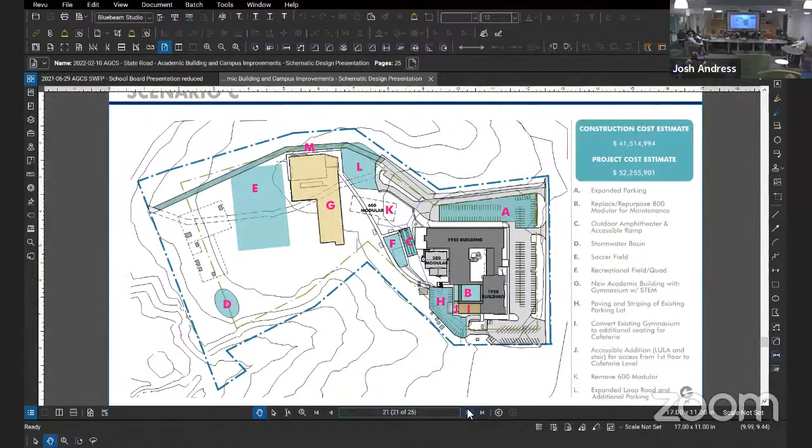So tonight, you're basically looking for an approval just to move forward and see what we can do. You're not looking for which building, you're just looking to reach out for a financial advisor to come in, and we're going to look at all scenarios.

I think it's important that we consider all of them and have their report come back with their recommendations and findings. I also think it's important that we start reaching out to underwriters, start having them come in, start those initial dialogues. There will be some coordination and collaboration with the financial advisor and the underwriters.

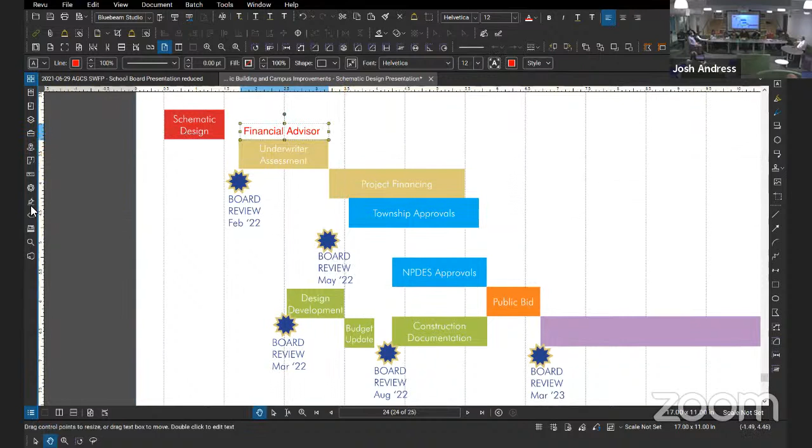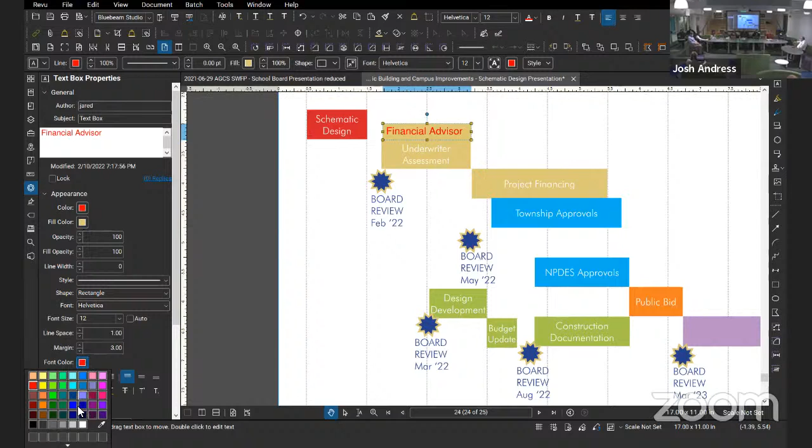And then the last time we did this, we had the underwriters in to do a presentation to the board. We had criteria the board scored, and then based on the board's assessment of the three candidates, the board determined by score who was the best underwriter for the school. And then with that, we wouldn't be able to move forward until the board actually made a decision on which option, if they were going to choose an option.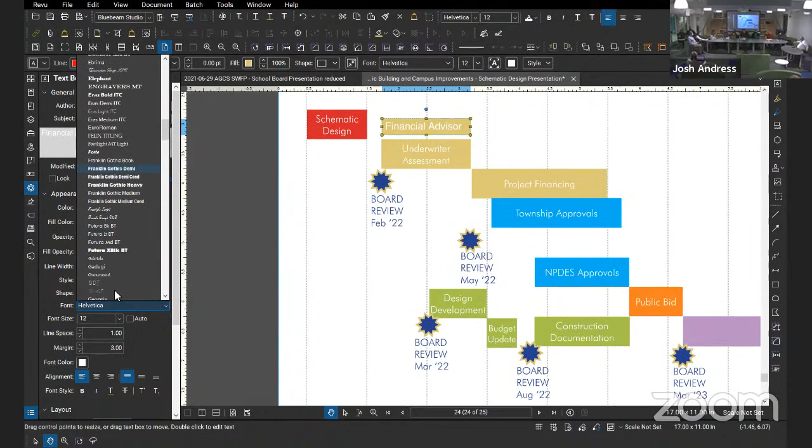So I would say that we need to get some financial information to the board. We need to get the underwriters in front of the board, so you have an opportunity to meet them, talk about the market. There's a lot of questions, it's ever changing. But we need to start that process now so we can at least get it moving.

Underwriters, there'll be no cost with that because they're in here and they're trying to secure our business. With regards to the financial advisor, there'll be minimal cost. I wouldn't think it would be more than 5,000 for the preliminary financials. You're not committing to a model, but you have to pick a model for them to do the underwriting and the financial advisor, because they have to go with a number.

Thanks, AG. Any more questions? The only thing I wanted to bring up real quick is the design development.

Do you want to talk, Jared, just about that process after the underwriter, what that would look like? Yeah, so when we developed the schedule, there was some hope that if we came back in March, we might be in a position to move forward, get approval to move forward at that time, and move into design development. We provided our proposal to Donna for those services, and the site civil engineer either did or is providing them based on the township meeting yesterday.

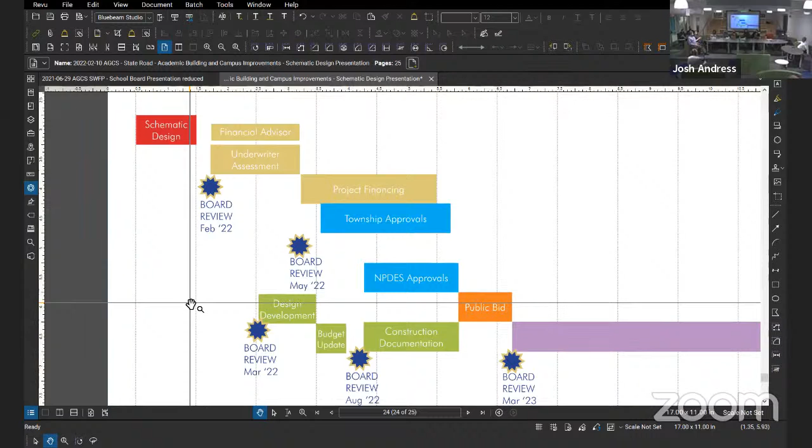So we have a rough idea on those overall fees. So the way the schedule is built would be, at that point, if we got approval to move forward into design development, as I said earlier, that'd be design development with then also land development included. That fee would be all in for that element. It's not the construction document aspect of it, but whatever the bid documents are going to be, that would be going in for the township, say we chose the all in to go forward with design development phase.

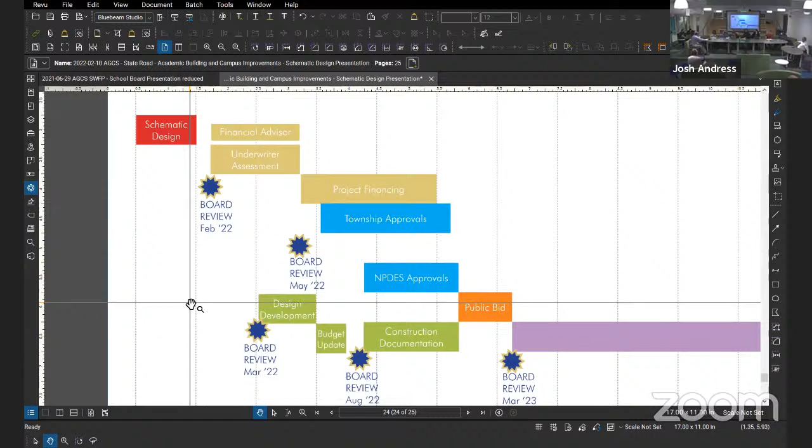That's what would be submitted to township, being all in. Doesn't mean all in has to be built. It'd just be you'd be getting land development approvals for the all in contract, which if there's a desire to split that up and do different things, that's the case. We're going to work through the design development phase and then again do a budget update and come back to the board. Potentially, I think we had a target around August to review the updated budget for the design development.

That is sort of the last opportunity to decide what the scope of the project is going to be. I think the only really big decision that we would need to move into design development is if the STEM program is in the project or not. I think the way we show it on the plan at the end of the building is not really what's the limit.

I think it's going to want to be massaging the building better, and this would be better integrated, and that's a pretty big piece to try to hold off as an alternate. So that would be the one piece we need a decision on.

And I think the other thing we discussed, we would recommend moving forward with a site survey at this time. Right now site surveyors are on a delay for some reason, but it's a pretty long lead to get them to come do things. So it would be worthwhile having them come out and start surveying it. No matter what option we go with, we need a site survey as part of the site. So unless there's a desire not to move forward with the project in total, I'd say that's warranted to go ahead and move forward sooner rather than later.

That would be before the March meeting. The surveyor is around $15,000.